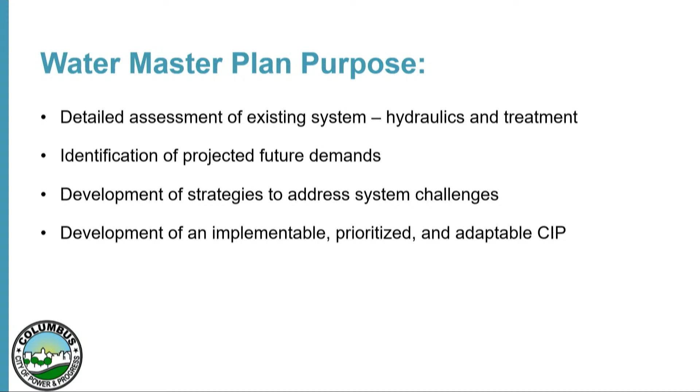Then we have to develop plans for how we're going to meet those demand projections. Then finally, we want to come up with an implementable, prioritized, and adaptable CIP. It's very, very critical that the city has a plan to go forward, and they understand what needs to be done, and that feeds into the rate study of how they're going to pay for it.

So this is a brief detailed scope, the basis of it. We'll talk through the demand projections and the system evaluation. The demand projections are based, again, on the 2040 Envision. The hydraulic model is one that we went into very detailed on, where we brought in all the GIS from the existing system and also down to the detail of the water usage by customer, to make sure we had that right. And now we have a good model for the city, and we can model the proposed improvements with the system to meet the 2040 demands.

Treatment evaluations, we'll talk about that in more detail with the water treatment options, and then well field expansion, and also clear well requirements. And finally, we'll wrap it up with the CIP recommendations.

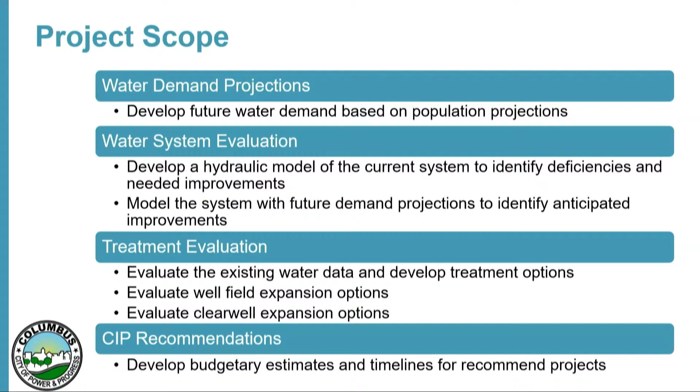So with respect to the demand projections, essentially the city of Columbus has had pretty steady growth since 1960, roughly just under 1% growth. And that's what we've used as our basis. It's a little bit on the conservative side, but that's what our growth is. Currently, in 2020, the city's population was a little over 24,000, and based on a 1% growth rate, it ends up to be 29,300. And that feeds into the demands that are going to be on the water system. So this is just graphically plotted out. You can see it's got a nice, steady graph.

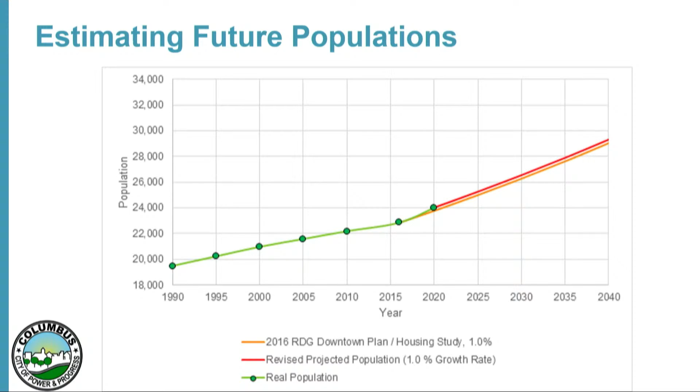Was any sensitivity analysis done on the growth rate? Did you go through and look at 0.5% or 1.5% growth rate to see how it might affect overall demand and overall plan?

That's a great question. We often will look at sensitivity on population. For a 0.5% growth rate, that would be more like the 2030. So the 2030 model would be half of that growth.

So that would be equivalent to... Excuse me, can we get you to identify yourself and talk? Hello, my name is Derek Gardells. I have the same address or work at the same place as Chris Koenig.

To answer your question, we didn't specifically look at higher growth rates. We looked at the 1% as being a conservative growth rate based on what we've seen historically. And we revised that growth rate up based on what the 2020 census actuals were versus what the previous projection was. So we felt like the 1% was pretty conservative on the top end.

Looking at a smaller growth rate for 2040, that would look very similar to what we showed for the 2030 population projection. So if it grows at 0.5% a year, then you would be closer to what that 2030 population was. But we didn't specifically look at a much higher growth rate, but that's something that could very easily be done as part of the models that have already been developed. So that would not be a difficult thing to do.

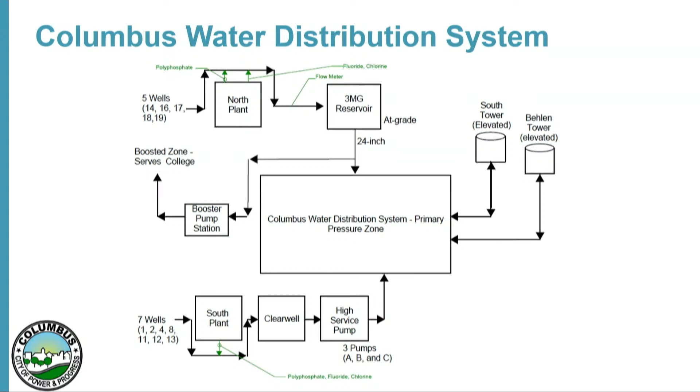Now, the Behlen Tower is also part of the system. Unfortunately, that tower is too short, and it really doesn't have much use for operational storage or for fire flow, just due to the height. The distribution system is all on one pressure zone, with the exception of the Central Community College.

So as I said before, we developed a very detailed hydraulic model for the system. There's 180 miles of water main in the city, and so we went through and modeled everything, every service connection, every valve, every hydrant, so that way we have everything very detailed.

And then we validated the model. The city had a fire flow test, and they provided the results of the fire flow test, what the pressures and flows were, and then we'd compare that to what the model was showing and tweak it as we need to, because as water mains grow old over time, their capacity gets a little bit less, and so it's always a little bit of a judgment on what the exact actual flow rate is going to be, and we were able to get it real close.

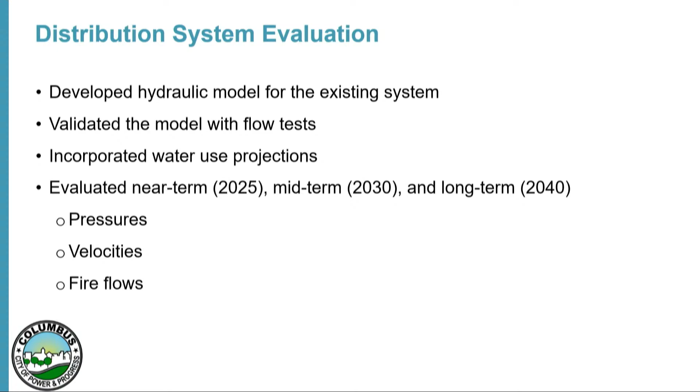The second part of that, once we had the model, so we know what we have today, then we look at what water use projections are going to be, but also looking at the Envision 2040 plan, because we looked at where the growth is anticipated for the city. And then we evaluated the near term 2025, 2030, and then 2040, looking at the pressures, velocity, and fire flows.

So again, here's the Columbus Envision 2040 on where the anticipated growth was. And so the projected growth that we had anticipated is laid on based on these requirements.

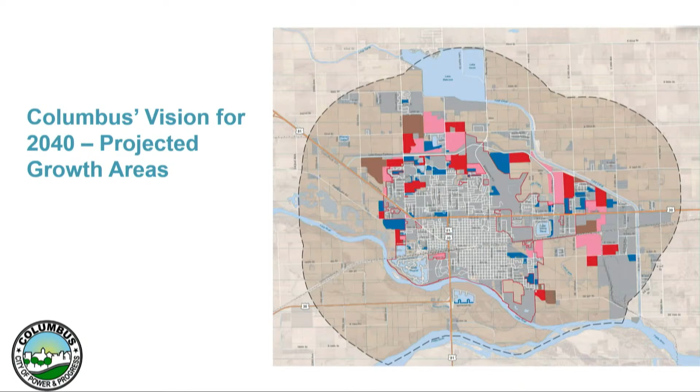So based on our growth projection, again using the 1% growth rate, you can see the existing average day demand. Average day demand is if you take all your water for an entire year divided by 365, that's your number. Maximum day demand is that one day out of the year where you have your highest peak, and that way you can compare them, because you have to meet the peak demand plus fire flow.

Now, the interesting thing with Columbus is that there's a high amount of industry use. Typically your maximum day demand is 3 to 4 times higher than your average day demand. But with Columbus, it's very steady at just under 2 times. So that indicates that you have a strong industry base, and so you don't see the big peaks that you normally see in a system.

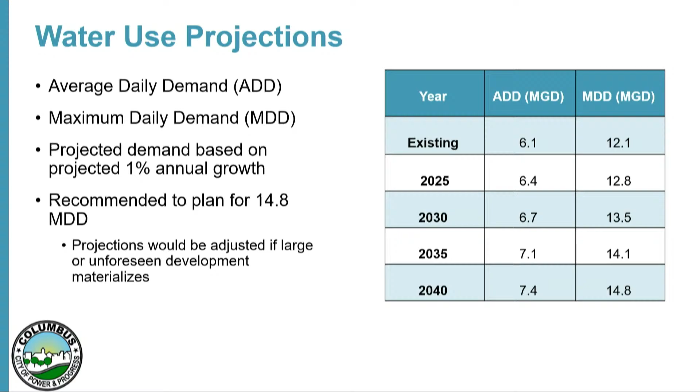And so the maximum day demand right now is 12.1, and based on 1% growth rate, that's going to be 14.8 in the future. And that's what we're targeting as what we need to meet for our supply and treatment demands. So again, this is just a linear progression as far as that 1% growth.

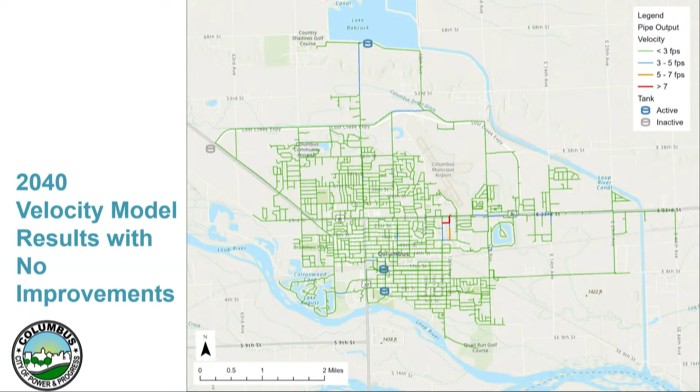Then the velocity. What's really interesting was even with 2040 and the fire flow demands, there weren't a lot of locations where we had high velocity. There's a couple red nodes right in the center, just below Highway 30, but not a whole lot. So Public Works has been doing a really good job of maintaining the system and addressing sizing issues over the years, and that shows a very solid system.

But then this one is the fire flow. This is looking at if you have max day demand and a fire at the same time. You can see there's a lot of orange and some red. For the reds, that means you have less than 500 gallons a minute to be able to fight a fire, which becomes very concerning. The ideal is going to be over 1,000 gallons a minute for fire protection. Wagner's Lakes is a trouble spot.

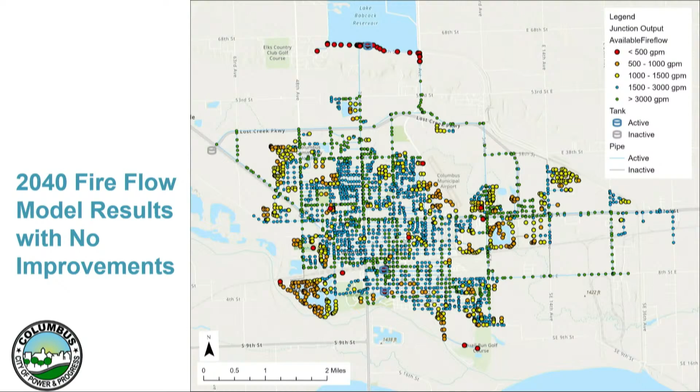So once we knew what the problems were, we developed our recommendation and modeled different scenarios so you can meet the projected 2040 demands. The red lines are new lines being proposed, with the exception of the one on 17th Street. That's a main replacement along 17th where we go from a 6-inch and upsize it to a 12 for improved water flow through that area. But most of them are just adding additional piping for looping.

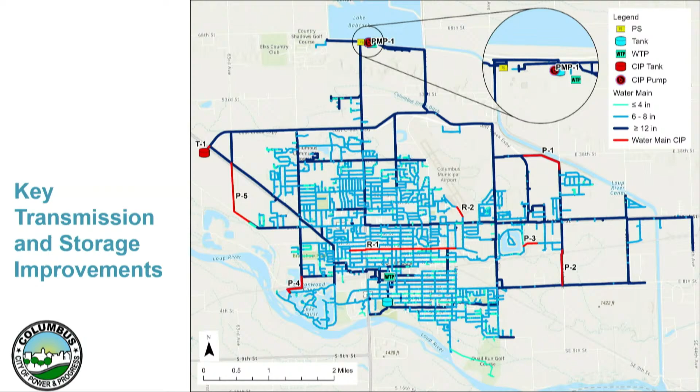It also includes the proposed elevated storage tank on the west side of town, which I'll talk about in a minute. But if we put all those in place, we end up where we want to be for 2040, where all the pressures fall within the desired range.

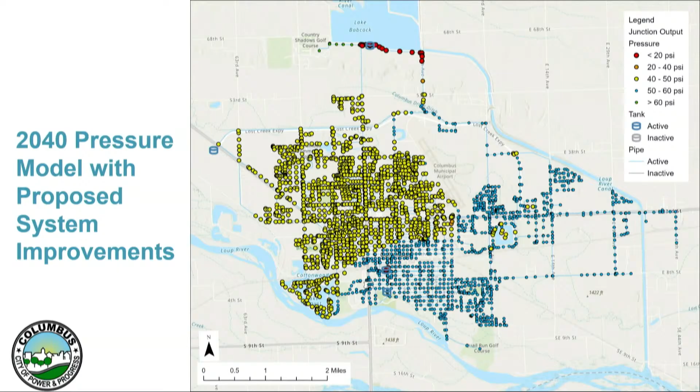So our next step was to look at the storage and pump stations. Storage volume is dictated by three components: operational, fire flow, and reserve. Operational is during normal operating days, the water level in the tank goes up and down as people use water. For fire flow, you have to assume your tank might be drawn down during heavy usage and then a fire starts, so you have to have that additional capacity in place for fire flow.

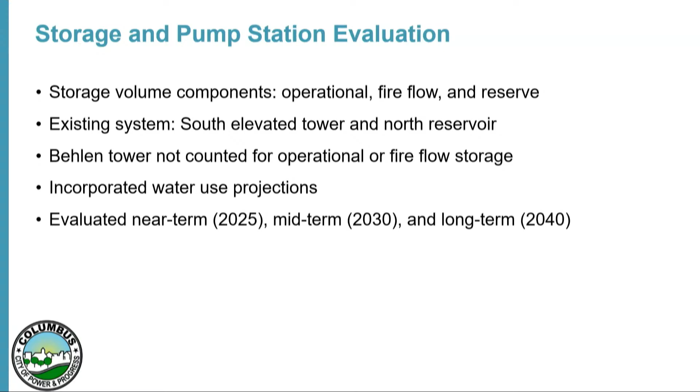And reserve is just having that cushion, because in the worst case scenario you have a fire going and a power outage, or whatever. There's a lot of things that can happen, and we want to make sure there's a little extra storage. So we're looking at the south elevated tower and the north ground storage reservoir that we talked about. In our evaluation, we did not include the Behlen Tower. And again, we looked at the 25, 30, and 40-year terms.

And we looked at two scenarios for the storage. The first one, I guess one of the key components is that north ground storage reservoir. It's a 3 million gallon tank, but you're only able to use the top 6.3 feet of it. Because if you drop below that level, then there's pressure problems. The pressure's downstream below 20 psi. And so you're not able to use that full 3 million gallons in that reservoir.

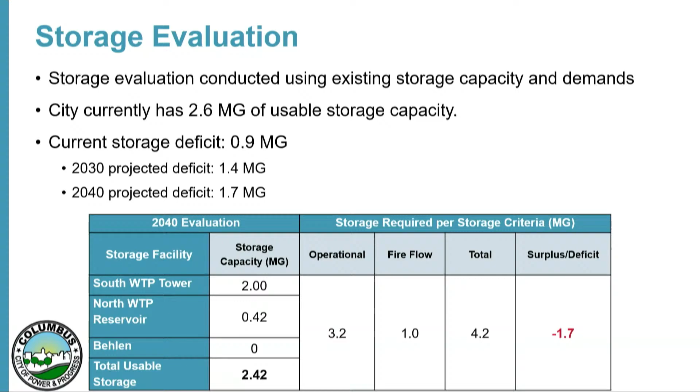And so what we looked at is, looking at the current deficit right now, that's what's showing the current deficit right now is 0.9 million gallons. And so, again, the south tower is 2 million gallons, north reservoir, the effective storage is only 0.42 that's usable. And so we have a 2.42, but again, that's where you see the deficits. So by 2040, the deficit is 1.7 million gallons.

Now, the second option that we looked at was when we add treatment to the north end, on the north treatment plant, we're looking at adding treatment to address manganese, is that the treatment actually knocks down the hydraulics in the system, and so you don't have as much water flowing from the wells into that ground storage reservoir, just because it uses hydraulics going through the treatment system. And so we're already looking at adding in a high service pump station.

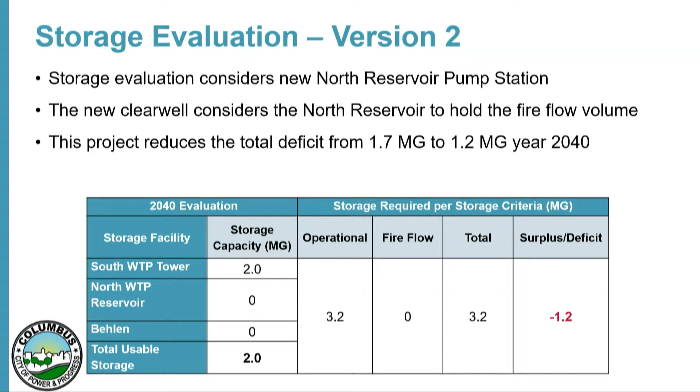Now what that high service pump station would do is use the ground storage reservoir as a clear well. And so it would pull from that and then pump out into the distribution system and to the new elevated storage tank. And when we run that scenario, that 3 million gallon reservoir at the north end, we can use that for fire protection. Because you got 3 million gallons, it's all there, and we can start using that reservoir more effectively. And so with that, that knocks down your deficit in the year 2040 down to 1.2. So you got a lot more cushion as you move forward.

Is there ever any thought to increasing the volume of a current storage? I mean, like with the Behlen Tower, you're not including it because it's not big enough. Could you expand it? Maybe it doesn't fit into all this, I'm just asking. I've heard of towers being taken down and put back up, but I'm not ever sure about raising a tower. Putting another level on like a grain bin or something. Yeah, I've never seen that before, but that's something we could look into.

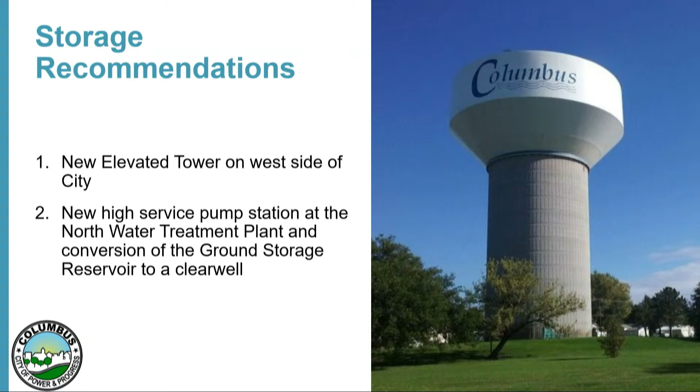So what we're recommending is a new elevated water storage tower on the west side of town. And again, with that new high service pump station at the North Treatment Plant, that makes that north ground storage reservoir a clear well and improves the turnover in that tank, but also reduces the amount of storage that's required in the year 2040. And there's actually a real good location for that off Lost Creek Expressway. There's a brand new main that's getting put into service pretty quickly here. They'll be able to serve that tank, and so it works out very well as far as the hydraulics.

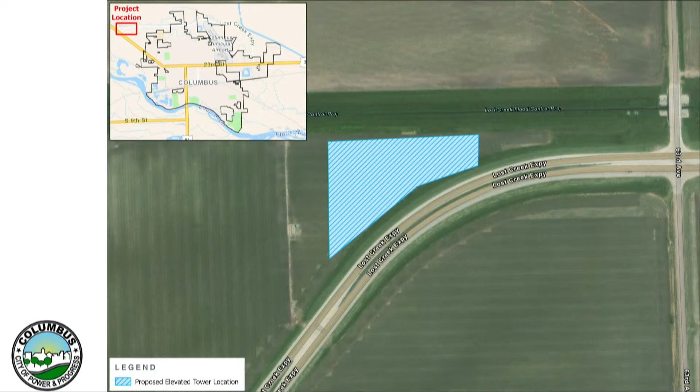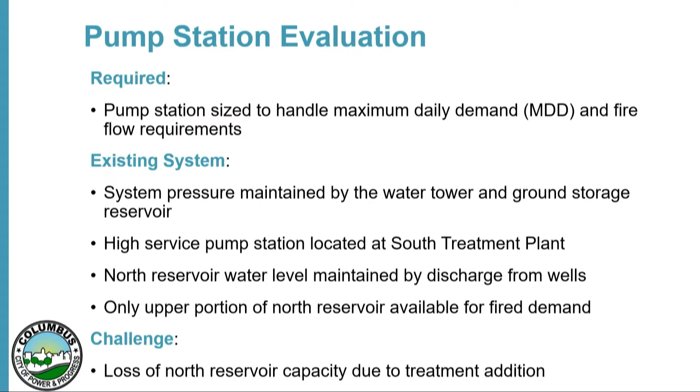The pump stations right now, again, we looked at mostly just the ones at the South Treatment Plant. There's a pump station there. There's the pump station that serves the Central Community College, but that's just an isolated one-off. It doesn't feed back into the rest of the system. And so we looked at different options. Again, with the North Treatment Plant, once we add treatment, we are going to have to add a high service pump station.

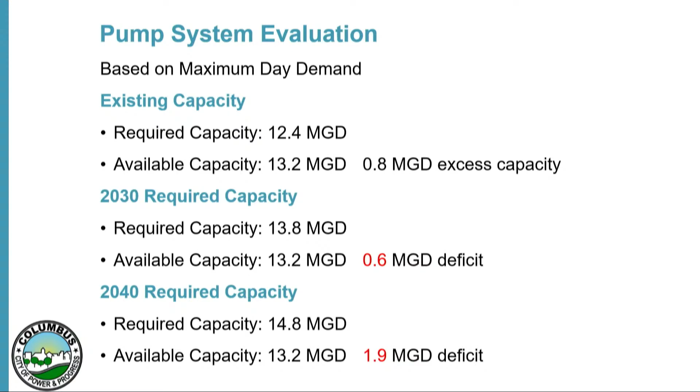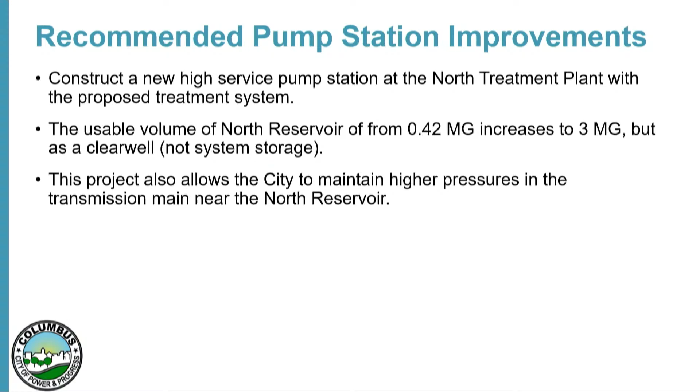Essentially right now there's in excess of 0.8 million gallons capacity because that high service pump station in the south end does very well. But when we get to 2030, you can see that we're already starting to have a little bit of a deficit, and by 2040, we're looking at a deficit of just under 2 million gallons a day that needs to be addressed. So again, the recommendation is to add a high service pump station at the North Treatment Plant and pull that water from that ground storage reservoir and use that as a clear well. So then next we looked at the water treatment, the well field, and an additional clear well for the south treatment plant.

So with the water, right now the water in Columbus is very high in iron and manganese, and manganese is a secondary contaminant, which means that it doesn't pose a health risk, but it does create some other issues. Mostly it's aesthetics with taste, odor, color, and things like that. So it's not one that the EPA has set a limit that has to be treated and removed at this time; it's more just aesthetics.

And the recommended level of manganese within the system is about 1.0 milligram per liter. Sorry about that. Right now, at well number 19, the manganese level, and this is the worst case scenario, is 4.45 milligrams per liter. The current process that the city is using is sequestering the manganese, using polyphosphate. The polyphosphate binds with the manganese and keeps it in suspension, so it passes through the system without causing a whole lot of issues.

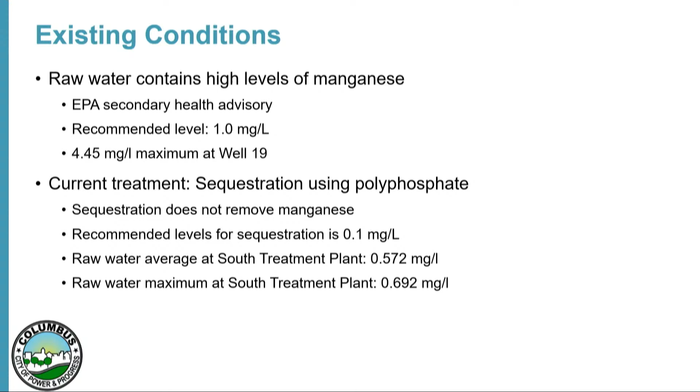Now, the EPA recommended level for using sequestering is 0.1 milligrams per liter. Unfortunately, the raw water at the South Treatment Plant averages 0.57, with a maximum of 0.69. So it's already getting to the point where sequestering doesn't work, and something has to be done. So we looked at different treatment options, and the one we felt was the most cost-effective and effective for the city was manganese green sand filtration.

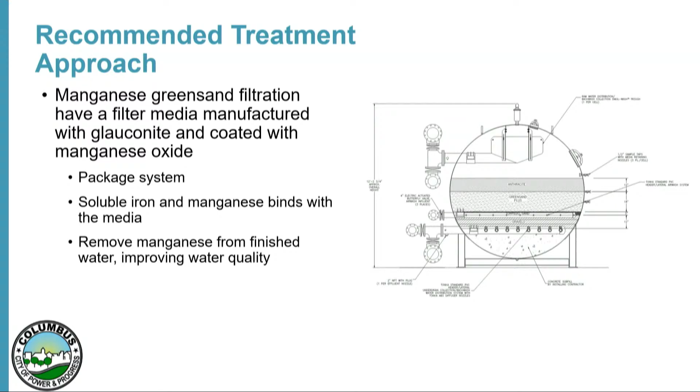It's a package plant that's delivered to the site, but essentially it's a filtering operation, as you can see in the diagram, where the water comes in and goes to the filter. The sand is coated with manganese oxide, which gives it the green tint, hence the green sand filtration. The manganese oxide binds with the manganese in the water and makes it insoluble, which pulls it out of the system, and we remove the manganese from the finished water, improving the water quality. Then they backflush the manganese and it goes into the sewer system.

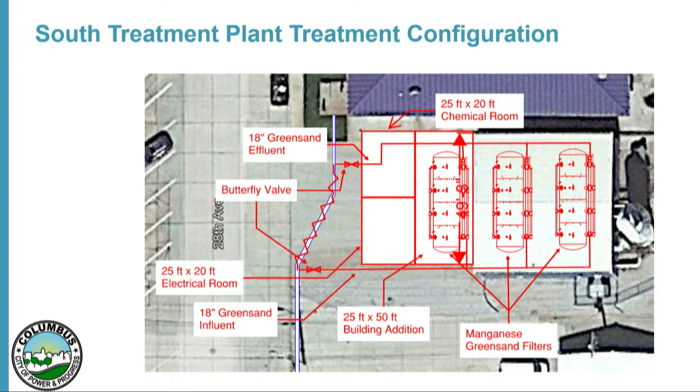With the South Treatment Plant, there's an existing building in place, and this is a schematic of how it could be piped. Again, it's a package unit coming as one unit, and we'd be able to have 3 of those at the South Plant. At the North Treatment Plant, there's not a building in place, so we're looking at building a new building with all the controls and everything else that would tie into that. Again, looking at a different number of units there and smaller units.

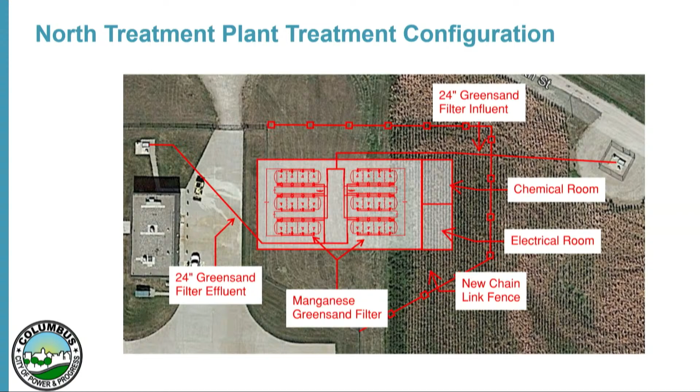The first one, we're recommending, would be the first project out of the gate: to install that new well. The second one would have to be in place for the projected 2030 demands. That new well would be located to the west of the existing well field, because what the city has found is as you go east, the manganese levels increase. Well number 19 is the far east well that causes a problem.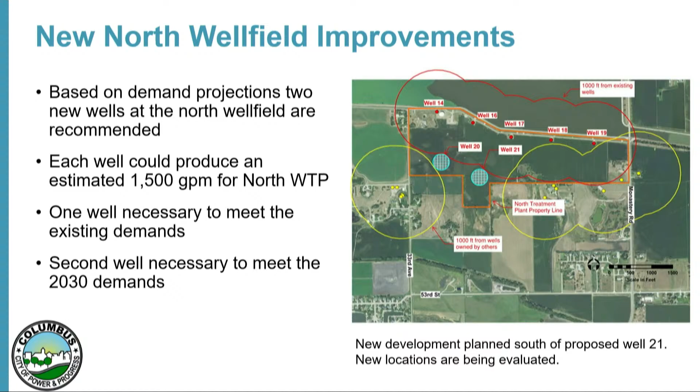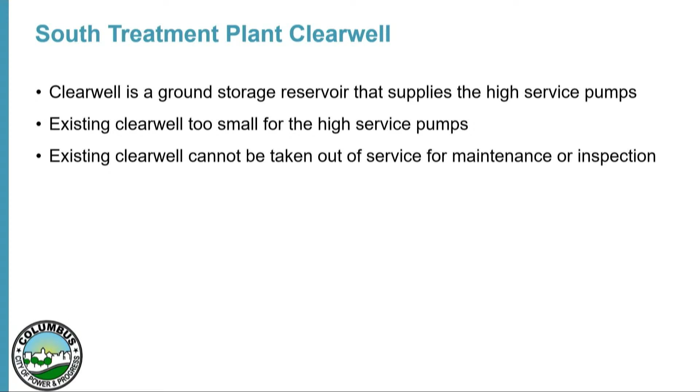This is the South Treatment Plant. Again, the water from the wells flows into a clear well, and then the high service pumps pull out of that and pump it into the distribution system. There's only one clear well, so it cannot be taken out of service, and it also is a little bit too small for the system as it sits right now. So the recommendation is to install a new one that would be installed next to it.

We looked at different options in that area, north of 10th Street, west of 28th. This is the recommended location, immediately to the west of the existing clear well. It would be built and operated in parallel, which means the high service pumps could either pump from both clear wells or pull from one or the other. So the existing clear well could be taken out of service for maintenance as needed.

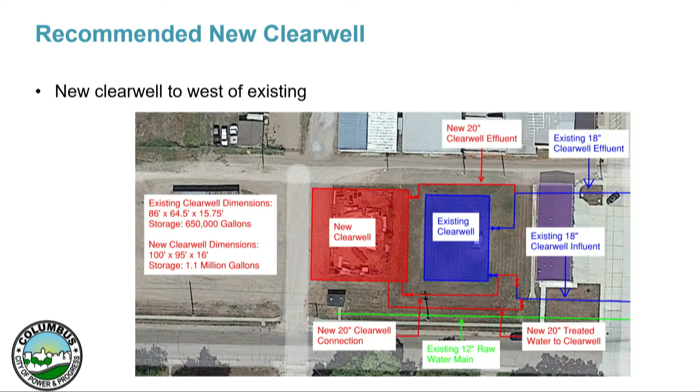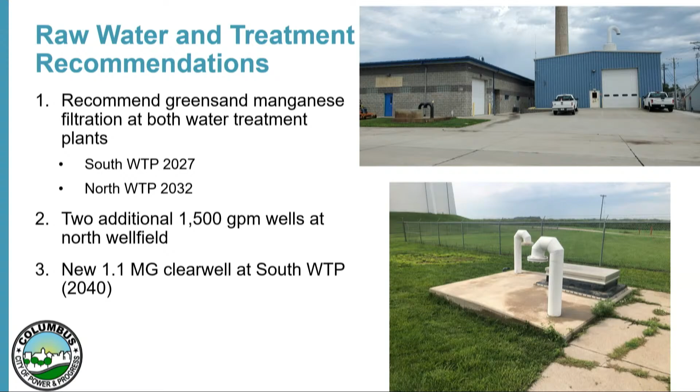So where we're at for the raw water and treatment recommendations is we're recommending green sand filtration at both treatment plants, with the one for the south online in 2027 and the north in 2032. Two additional 1,500 gallon per minute wells, one on site and the other to the west. And then a new 1.1 million gallon clear well at the south treatment plant.

Did you say that we had more issues with the north well? There's the one well that's problematic, well number 19, where it's very high in manganese, so it's not used very often. But actually, the manganese levels within the south well field are higher than in the north overall. Okay. And so that's why we're recommending going with the south first.

So then we took all of our findings and recommendations and rolled this into the prioritized CIP. Again, this is our best guess as far as the timing of the projects, and it can vary. If a new development comes into town and new transmission mains need to be installed, or if growth doesn't occur as projected, these can be adjusted up and down. But based on our assumptions for the city's growth rate and the 2040 Envision plan, this is what we're looking at.

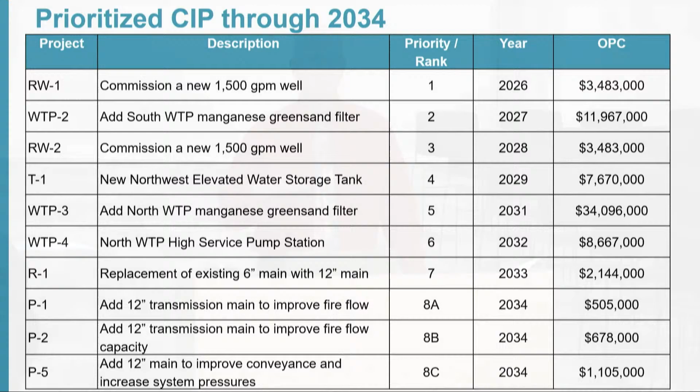This is through the year 2034. The first one would be the new well, then start working on the green sand filter for the south treatment plant, add the second well, and so on. The transmission main projects are down the list, but those are floaters. If new industry or development comes into town, or the city sees a fire flow problem in a specific area, they can move those up the list as needed. So there's a little flexibility on those.

How have you costed those items that far out? This is all based on today's dollar, and Sean will get into the details on the projections for escalating the prices going forward in the water rate study.

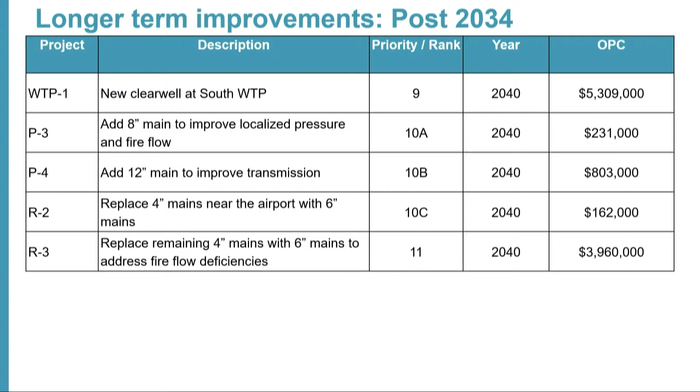Good afternoon, Sean Korn, HDR Engineering. After you have the overall capital plan, we can roll that into our rate study. This afternoon I'll walk you through the rate study, what it entails, and the process. We'll talk about the 3 steps of a cost of service study: revenue requirement, cost of service, and rate design, resulting in cost-based and proportional rates for your customer classes, residential, industrial, and then answer any questions you may have.

So what is a rate study? We think about our goal or outcome as we develop the analysis. The first is developing a sufficient projection of revenues to adequately support the operating and capital needs of the water and sewer utilities. This is independently calculated: water is water, sewer is sewer. The projects Chris walked you through are all on the water side, so that master plan CIP plays into our water rate study. On the wastewater side, we have the current city plan built for the analysis.

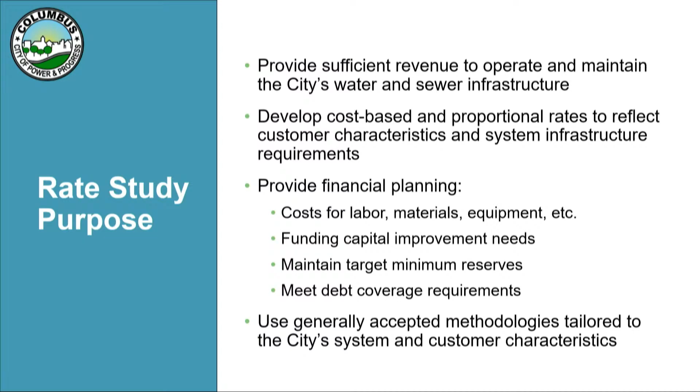So just like when we go out in our personal lives and borrow for a house or a car, there's the credit check. On the utility side, there are certain revenue projections that need to be met, and that's typically referred to as a debt service coverage requirement.

To develop the analysis, we base this on generally accepted methodologies and approaches. There's two manuals out there, one by the American Water Works Association, one by the Water Environment Federation, that lay out the process, the revenue requirement, cost of service, and rate design, that we then follow. But this is based specifically on your system, operations, your customer characteristics.

So the three-step process is sequential. So as we go through this, our revenue requirement defines what our operating and capital expenses are and how we're funding those. Once we know the overall revenue needs or adjustment to rates to fund those revenue needs, then we go through the cost of service.

Now, we have to develop a cost of service because we serve different types of customers. Chris talked a little bit about this on our average day versus our peak day. When you think about how we use water over a course of a year in our single-family homes, right? We have low use in the winter, and then we peak in the summers.

We're watering the lawn, washing the cars, spraying the driveway down, whatever we may be doing, and then it drops off in the fall and winter, and we have lower. So that is that peak that he's talking about that we need to develop the system around. And from a cost of service perspective, we allocate costs based on who's driving that peak.

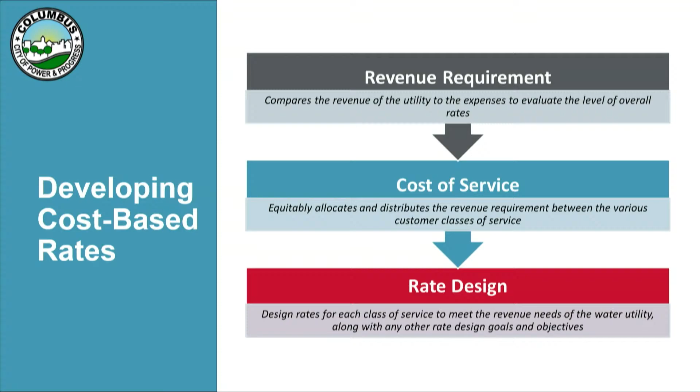Once we know the answer to those first two, then we can dive into the rate design, and that's how you charge your customer, through that monthly fixed charge and through that consumption or volume charge for water or sewer. So as we go through the analysis, a couple of the key issues we looked at is adequately funding our annual operating costs. This goes for both utilities.

Thinking about how costs have been increasing annually from inflation. So we've all seen this at the grocery store, the gas station, everywhere else, the costs going up. The same thing happens to the utilities. Electricity costs have increased, chemical costs have increased, that we need to capture as part of this, while also maintaining our financial metrics. We also want to think about those capital needs.

Chris just walked you through the water capital, some fairly extensive projects that you'll see how they impact the water rates. On the sewer side, based on the plans in place today, we have adequate revenue for a pay-as-you-go approach. So we're funding our capital needs through our current rates and reserves going forward.

So jumping into our revenue requirement, again, really what this revenue requirement does is look at our operating and capital needs, and then determine that level of rate revenue adjustment necessary to support that operating and capital. Again, based on how we fund our annual capital plans, how we've determined the amount of renewal and replacement needs, maintaining target ending reserve balances.

We generally look over a long-term period, so we're looking at over 10 years. The rates and information you'll see here, we'll have some charts with all 10 years. The focus of the rates is over the next 5 years as we start thinking about what those needs are. And we do that for two reasons.

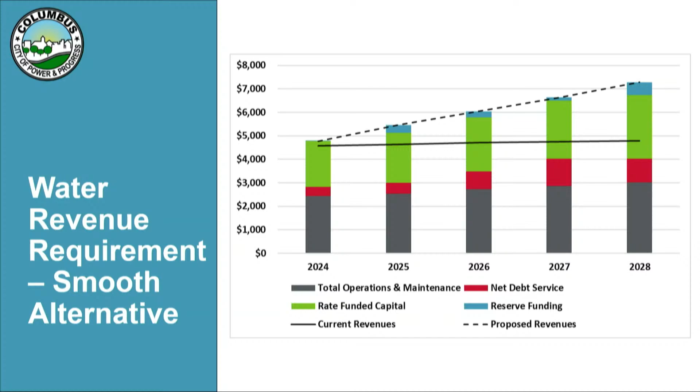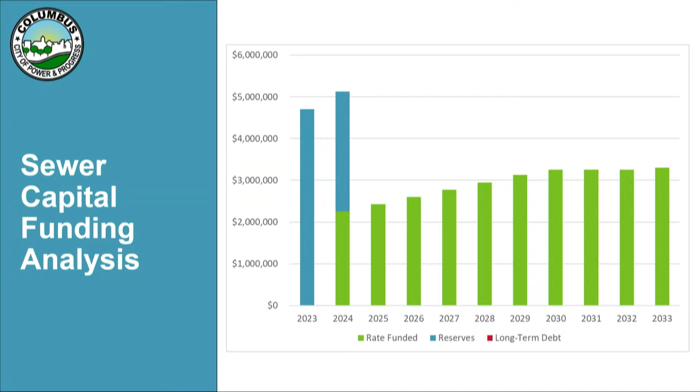Same approach on the sewer side. We're looking at our capital needs. We have a couple large projects in this current year and next year. Those are mostly reserve funded. The blue is our use of reserves. The green is our rate funded capital. So again, you can see that is increasing each year to reflect an adequate level of renewal and replacement in the system, but maintaining that overall funding at about $3 million as we get out to year 6.

Now, slightly different picture on the wastewater side. Our revenue requirement sums our annual O&M, that's the gray component, some existing debt service that you have, which is the red, our rate funded capital, which is the green, and our blue, which is some minor reserve funding. Again, the solid black horizontal line is current revenues at current rates, with our current customer base plus 1% growth.

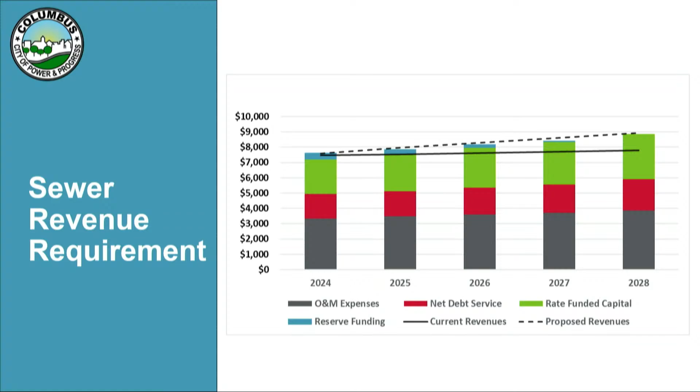And to bump that up, it's a much smaller gap. This is running at about 3% a year, which happens to be roughly our inflation assumption in the out years. So on the sewer side, looking at revenues today versus expenses, we're adequately meeting our targets. So we have what you would say is a balanced budget on the sewer side. As you go out, we do need to increase that to account for both inflation and O&M, plus increasing rate-funded capital into the future.

Reserves are sitting right about our target, same minimum target, 90 days of O&M plus 1 year of CIP. This would be the same, less any debt funded, but we don't have any debt funded or financed projects on the sewer side of this.

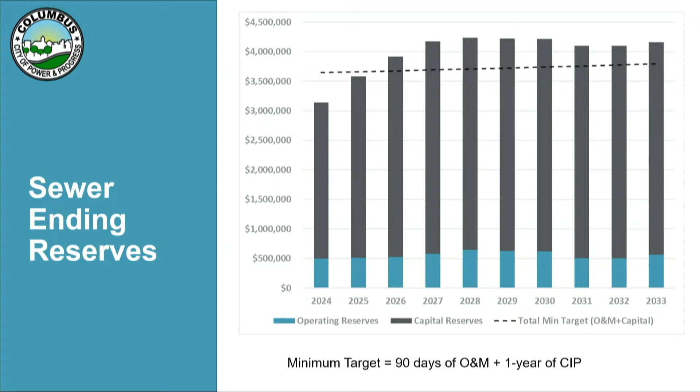One note on the 90 days, that's kind of on the bottom third of the target list of what your minimum would be. You go to some of the bond markets or the financial markets, there are agents going out and wanting you to have 180 days or 365 days. So 6 months of O&M to a year of O&M on hand. Again, that's total cash, so when we're looking at 90 days plus 1 year of CIP, we're running right about those nice targets overall as a total combined operating and capital.

So once we know the overall cost, the top of each of those bars for our revenue requirement, we can go into our cost of service. Now, when we think about our cost of service on the water side, we're looking at our average annual consumption. So how much water does each customer type use? And we're looking at residential, commercial, and industrial categories. And how is their peak consumption impacting the system? So I mentioned this a little bit earlier, the different peaking on the system drives the sizing. So those that drive the cost or the peak should pay for their proportional share of those costs. So that's what we're looking at.

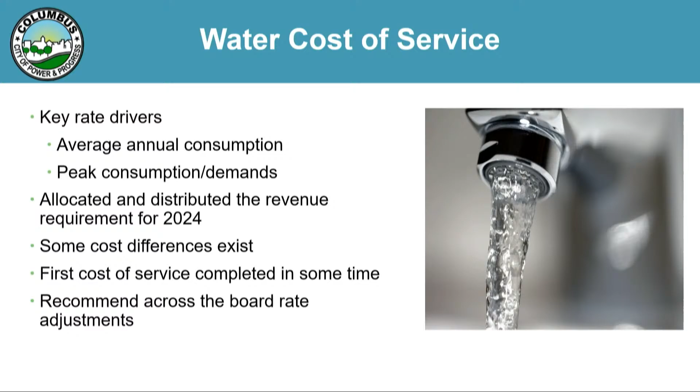So as an example, if single-family customers used 50% of the water on the system, they would be allocated or distributed 50% of the average day costs. Now, that may vary when we start looking at peaking or capacity. Because residential customers make up a higher peak on the system, they could have a greater proportional share of the peak cost. Whereas industrial may have a lower proportional share because they don't peak the system.

Now, that's where you get the difference in your rate. So if you look at your rate schedules right now, we have a fixed charge for everybody by meter size, and then we have different consumption charges for residential, commercial, and industrial. That's reflecting their peak use on the system.

So we went through and developed a cost of service analysis. There are some cost differences in here. I will say this is the first cost of service completed in some time, where we're looking at the distribution of cost between customer classes. Again, residential, commercial, and industrial. So at this point, we're recommending an across-the-board adjustment. So rates would be adjusted equally for everybody going forward.

On the sewer side, similar discussion. It's based on average wastewater volume, so what's being discharged and treated at the plant, and the strength of that wastewater. Higher the strength, harder it is, and more costly it is to treat the wastewater that's coming to the plant. Not something we usually think about, but there are additional costs depending on what's coming down the pipe. We did the same process for residential, commercial, industrial. There were minimal differences here on the sewer cost of service. The rates are looking really tight as far as cost of service goes.

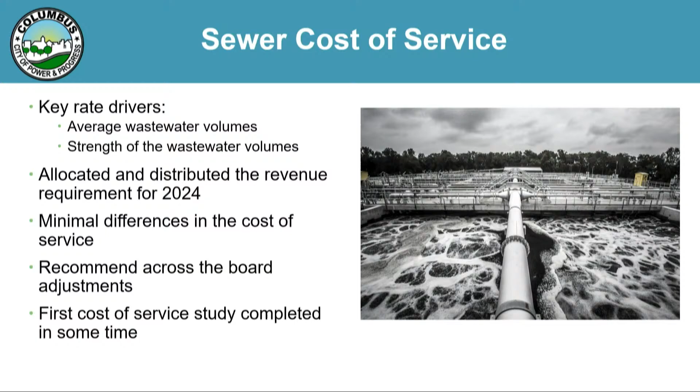Part of that is because when we get to the rate, you'll see you have a high strength surcharge component, which actually captures those customers that are impacting the system on a greater level. So again, given this is one of the first cost of service studies done in some time, we're recommending across the board. So now we know how much to collect. We know who to collect it from, in this case, equally among all customers.

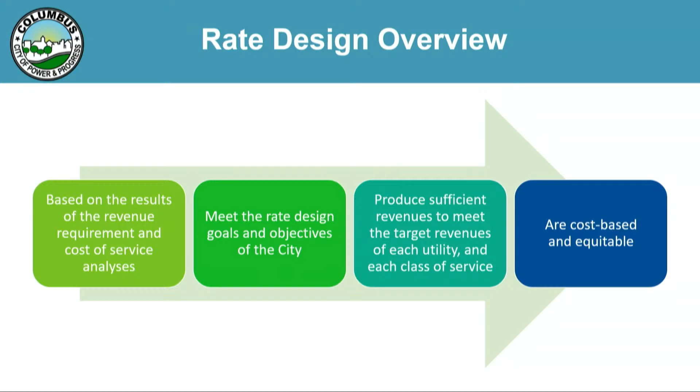And so then we looked at the overall rate structure and how we charge it. What we're recommending right now is we maintain that current rate structure for both utilities. That includes that service charge or monthly fixed charge that varies by meter size, plus a flat fee per 1,000 gallons, the usage charge for all customers.

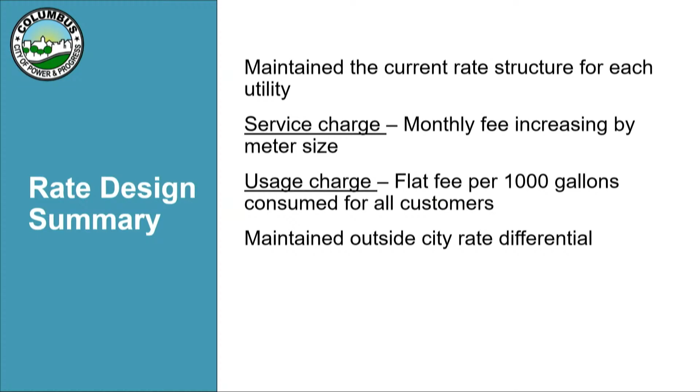Now, you also do have an outside city rate, so those customers that are outside of the city, they're charged a differential. We've maintained that differential as part of our rate development. It's a fairly common process that utilities, cities use as part of their rate setting process. I'm actually part of a group that's reviewing outside city rates for another agency. So as I mentioned, we had two alternatives for water.

The first is our smooth assumption. That's equal adjustments across all rate components for all customers. That was 9.5% per year for each of the 5 years. Scenario 2, the upfront rate increase. Again, everybody increasing the same, each rate component increasing the same, but it's 15% for the first 3 years, 6% for the subsequent years. And on sewer, it's an across-the-board adjustment, so 3% evenly on everything.

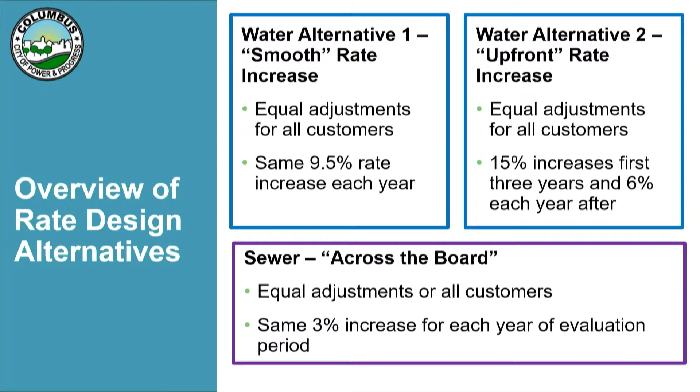Now, one of the questions you may be wondering is, well, why does sewer look so great and water's not looking so great? Well, there's a couple things going on. One of them is sewer was in this situation about 10, 12 years ago, where you had some fairly significant capital improvement needs on the sewer side that you issued the existing long-term debt from, that you also funded on a pay-as-you-go basis.

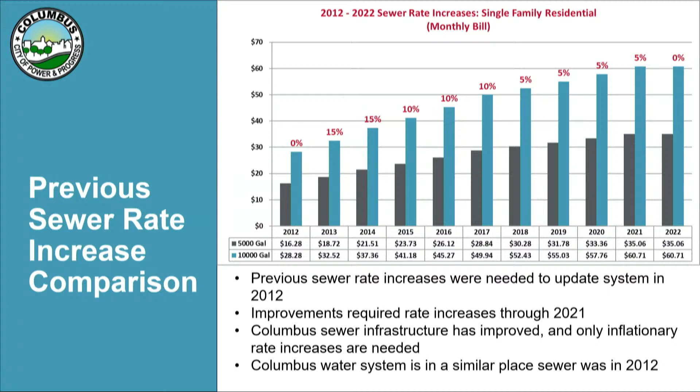And so you can see on the slide what those adjustments look like. We had somewhere in the neighborhood of 15% for a couple of years, a handful of years at 10%, and leveled out at about 5%. So that was funding those sewer capital improvement needs that were identified. And as part of that, you've set the stage for why sewer is looking okay. We're looking at inflationary adjustments now going forward to fund those capital projects.

So as we think about that, it's how do we fund that existing capital plan, those impacts of inflation on the water side, the manganese treatment, storage and transmission improvements and new wells, and the timing of those as we start out through 2026 and beyond. Maintaining our adequate reserves for cash flow requirements, emergencies, and if debt is issued, that is one of the requirements that the lending agencies will look at, is how much cash or reserves do you have, and maintaining the financial metrics.

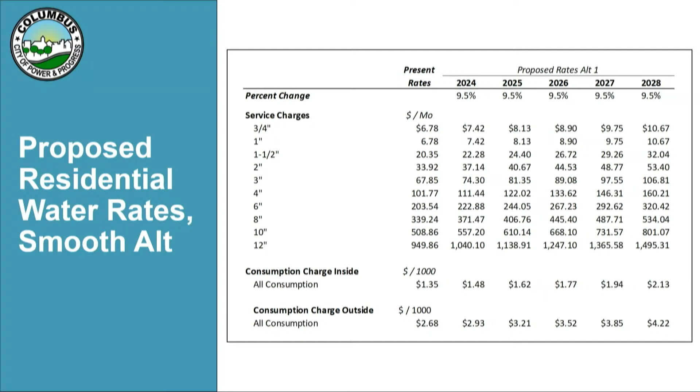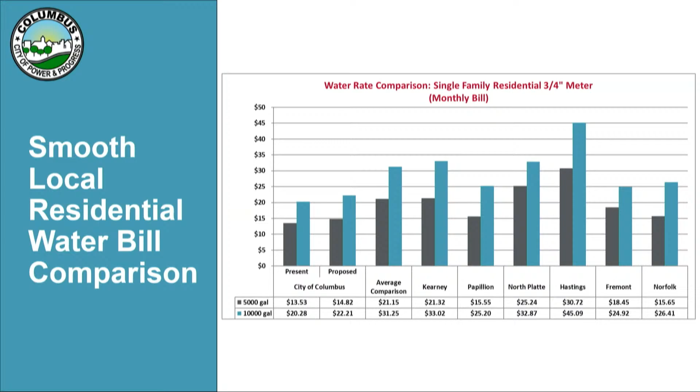Overall, just from a pure comparison, looking at an average bill, fairly reasonable, fairly similar to the other agencies as part of this. Again, we don't know where some of these are in their process. They may be going through a rate adjustment like this or evaluating this. They may have just done it. So again, timing is everything here.

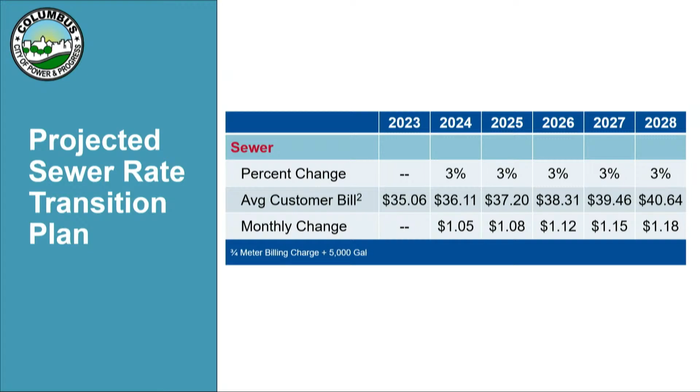On the sewer side, here's our 3% a year, the current sewer bill, $35, and that increases just over $1 per month per year at that 3% annual adjustment. And again, what those rates look like, the service charge by meter size, as well as the consumption charge for inside and outside. And then on the bottom of this slide, you can see those strength sewer surcharge rates.

So those are charged per pound of BOD, TSS, or grease. That's the measurement that's used. And you can see those are for those customers that discharge higher strength into the system. They're billed for that additional strength. So that's one reason why sewer looks nice and neat, is you have charges like this. This is something I recommend in a lot of places if they don't have them, because we do have those impacts on the system.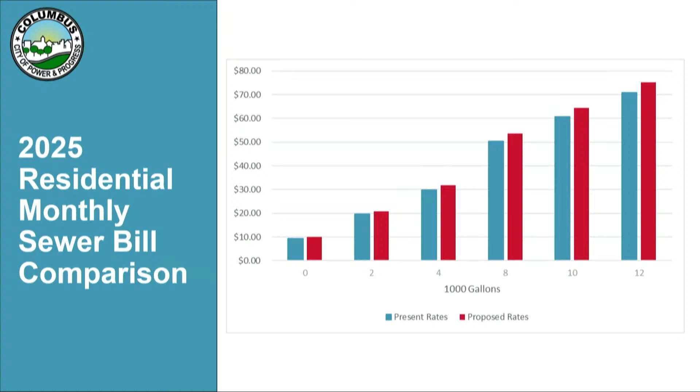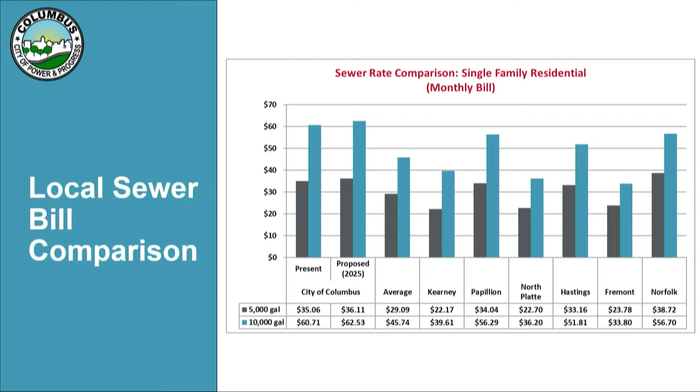And then finally, a bill comparison, different usages for our typical single family at 0 to 12,000 gallons per month. And then the same folks on the sewer side, again, a little bit higher. The city is right now today on the sewer side, given the improvements y'all did back in 2012 and after to get up to this level. And then you'll see some of these agencies again may have to do similar improvements. It's kind of this catch-up game, right? Who goes first as you adjust rates, as you go through that process.

So to summarize, really here, the rate adjustments are necessary to support the ongoing O&M expenses and inflationary impacts, specifically on the water side to fund the capital improvement needs that were identified in the master plan. On the cost of service side, we did see some differences on the water side, but again, first true cost of service where we looked at customer classes. It's one data point. I don't like making decisions on one data point when we're looking at how customer characteristics can change. So we're recommending those across the board adjustments.

And then we've maintained that current rate structure, and only the level of the rate was adjusted to reflect the overall system adjustments. So with that, I will turn it back over to you if you have any questions on the rates. Council members, do we have any questions for Shelley? On the meter size, on the cost of service, in your analysis, you found no change in our cost of service per meter size?

So that is a really good and challenging question. So at this point, we did not make any adjustments to that. We just increased it by the percentage. So when we think about the meter size, it's how do we recover at least a portion of our fixed cost. When we really look in the short term, fixed cost for a water or sewer utility, more on the sewer side, about 80 to 90% of our costs are fixed. So if nobody flushes their toilet or turns on their tap, the vast majority of our costs are going to stay here. So when we think about the fixed charges or that meter charge, then we need to think about what do we include in that.

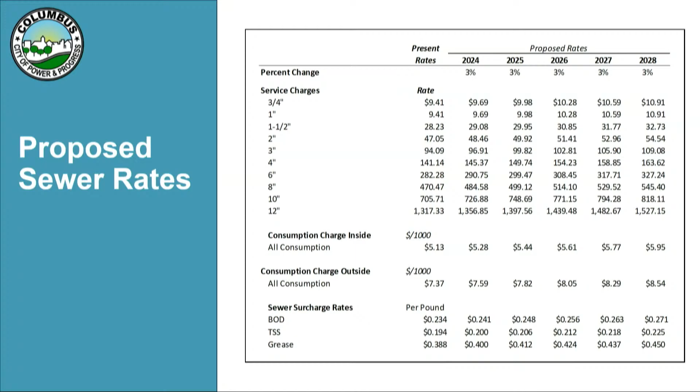It would be our debt service, right? We have to pay that no matter what happens. And maybe a component of our distribution or collection and conveyance system, because we incur those costs regardless of whether anybody utilizes it. So, sorry, long answer, but we did not make any recommended changes to it. And there's lots of options within that discussion.

I guess my basic question is, do you feel that the service charge reflects a fair charge to the customer, or to that class of customer? Yes. Yeah, I do, and part of that is, as we start thinking about water and sewer rates, one of the big topics in the industry right now is affordability.

And when we start thinking about our water and sewer bill, the customer can't control that fixed charge. And so that $10 for both water and sewer roughly provides a reasonable recovery of the costs. It's kind of in that average range when we look at the rate surveys. And the customer can control, most of the time, their water usage. And that's where we can have that higher charge. So yes, I think it is a fair representation of your costs. Could we change it? Yes, but there's also some disadvantages to that as well.

Another question comes up concerning demand. And you talked about residential demand for water usage, but that same demand is not the same for sewer usage. Sewer usage, I would imagine, is relatively constant for residential as well as industrial. Is that a truism? There are some differences, and it really depends on the demographics, right? As we start thinking about who's in a home, how many people are in a home, are they home all day, are they at the office all day?